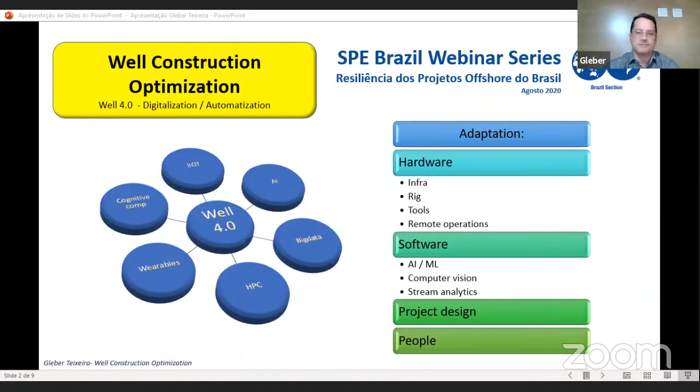This terminology, in general terms, represents the widespread and interconnected use of emerging technology such as digitalization, automatization, IIoT, wearables, AI, cognitive computing, big data, and so on. Everything, of course, applied in well construction activities, among other things, to optimize the process as a whole.

For it to be possible, research, development, and of course, adaptation are necessary. So talking about adaptation, I would highlight some topics, as we can see on the screen, to have this well 4.0, or all these things together.

We need adaptation in the hardware, and I mean infrastructure, rig adaptations, tools, remote operations, and so on. Of course, we need, moreover, software adaptation to supply conditions to have a pipeline in AI, machine learning, computer vision, stream analytics, and so on.

Moreover, we need the project design adaptation, and of course, the main drive here is the people adaptation, as we will discuss further. Please, next slide.

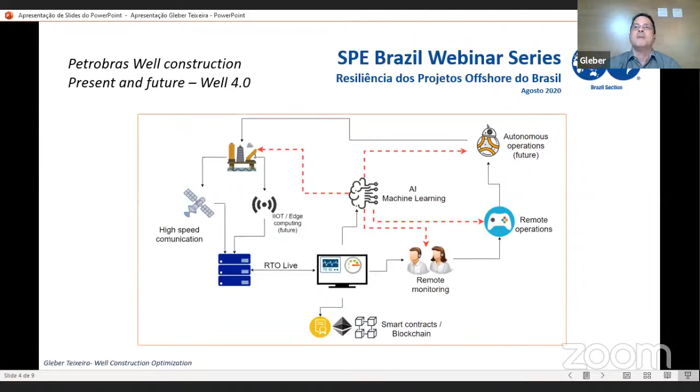Here I am showing the decision support center in Petrobras, as we are testing remote monitoring and also remote operation, and maybe in the future autonomous operation. I'm going to show a very brief video to show you some of the developments and ongoing projects in Petrobras. Here I am showing the RTO Live that brings all the data sensors from the rigs.

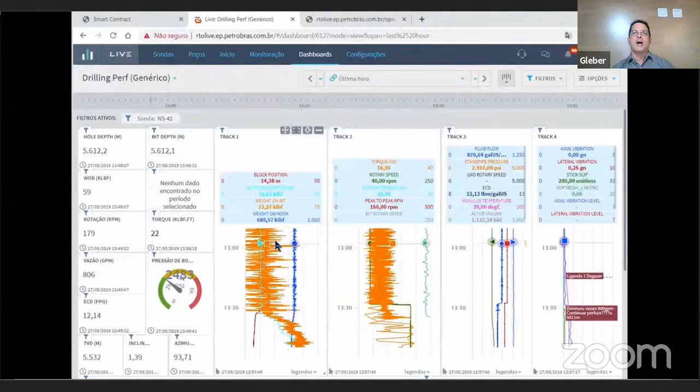Here is our prototype of smart contract using blockchain technology, emulating the Ethereum blockchain. We are emulating sending the monetary unit from the contractor to the blockchain and through the third party company. Of course it's a prototype, it's an emulation. Here I am using the Ethereum blockchain to record all the transactions.

Here I'm showing you a system that detects oil and gas seepage, oil and gas leakage. Another system detects movement using computer vision, movement in the wellhead, to see how much movement there is.

And here is a project showing a system that evaluates bit abrasion, the max drill depth based on lithology, area, bit model, and many parameters based on machine learning algorithms that we trained with historical data from our database.

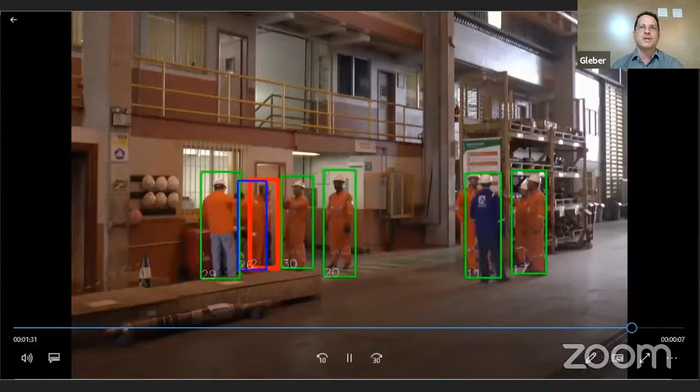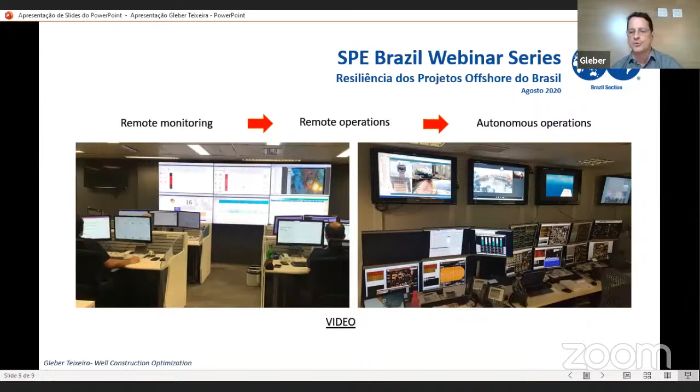And the last one is a video showing the S3MS, a partnership from our research center, CENPES, in partnership with UFMG, UNESP, Instituto Eldorado, for detection of personnel using or not using PPE.

Just a brief commentary about the video we passed, that image showing the oil leakage in the seabed was provided by Professor Bing Wang from University of Missouri. They provided us to test our algorithm that's still in development in UFF, Universidade Federal Fluminense, and also the Projeto Reis in Petrobras.

Another software I'm showing you is about design automation. In fact, it's a well-design platform that we call Poço Web, and we want to provide in the future all the automation and intelligence layer to perform all the steps of well design, based on simulations, based on historical data, and so on. It's an ongoing project that we are developing in Petrobras.

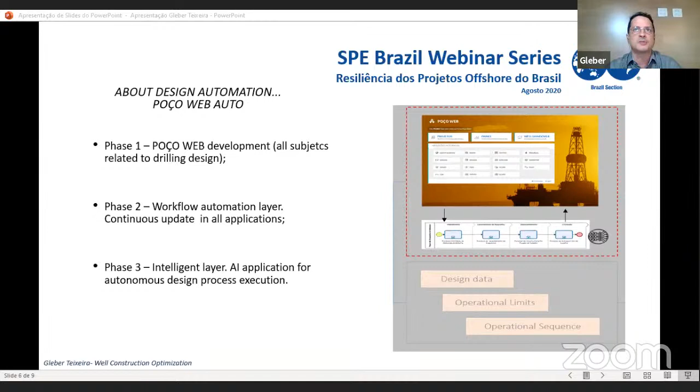Next one, please. I have just 1 minute more. Sorry, because it's so fast. The time is very short.

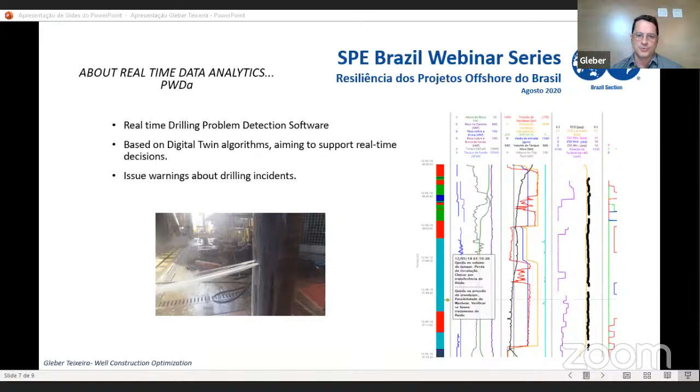Talking about real-time data analytics, we are developing the PWDA with E3S in partnership with E3S. It's a real-time drilling problem detection software based on digital twin algorithms to support real-time decision making. And here in the picture, we are showing when the software detects a possibility of washout, we pull out the string and detect, in fact, there was a washout in the string.

So finally, what do we expect from well service providers and the driller contractor? We can highlight this main issue: new technology, of course, meaning cost reduction, communication protocol agreements, for instance, with WITSML, Modbus, MQTT, REST API, and so on.

Another very important point is the training and qualification of employees. We are not talking just about conventional employees, for instance, petroleum engineers or chemical engineers. We are talking about new data skills and new jobs, for example, data scientists, data engineers, IIoT technicians, blockchain developers, and so on.

And finally, contractual adjustments, of course, to make it possible. And all these things, of course, we keep an eye every time on improved safety conditions and improving to avoid problems during operations. So my final remarks: we need to have resilience to be competitive in the current scenario, as Pedroso said in the beginning of the event.

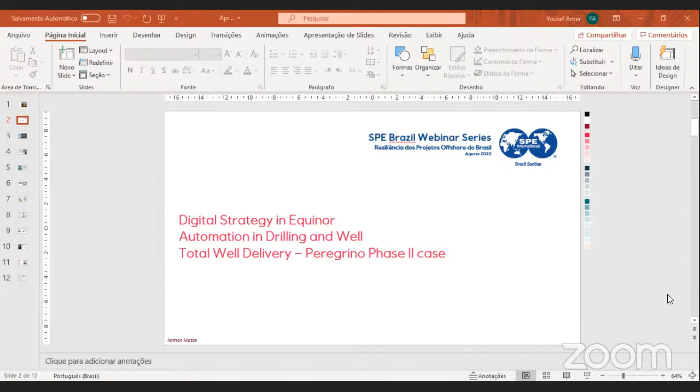Hello? Could you please put the slide in full screen, Pedroso? Hello, can you hear me? Oh yes, let me see if we can fix that. That's okay, good, thank you.

So I intend to go through three main items. I'll start by giving an overview of the digital strategy in Equinor and how optimization fits into that strategy. Then I move to the second topic, narrowing to automation in drilling, which I'm sure will draw our attention to the main initiatives to optimize well construction. And finally, our case in Peregrino Phase 2, called Total Well Delivery. My idea is to briefly touch upon this in a 15 minute presentation and give enough time for good discussions and questions. Okay, next please.

I would say that every great achievement starts with a good plan, right? So here I show you what Equinor believes in regarding digital strategy. Just by labeling ourselves as the digital energy company gives an idea of our ambition on this matter, right? On the left side you see the three main items of the corporate strategy, and on the right side, our digital directions.

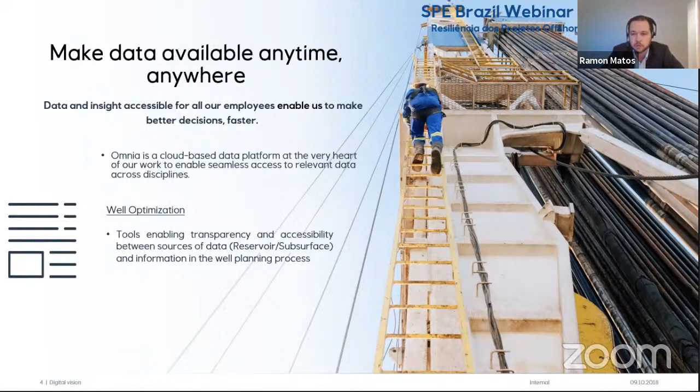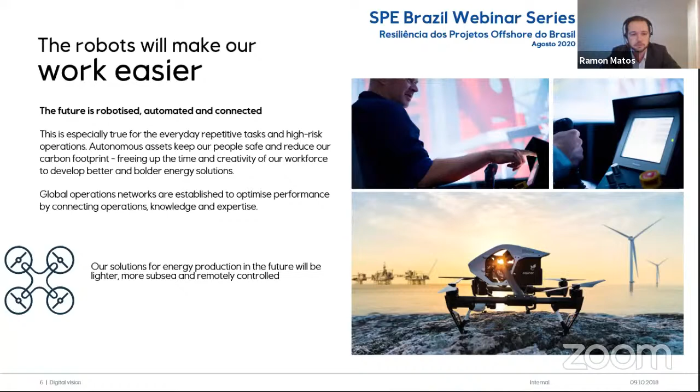And then we get to the end of the strategy. As I said, the digital path has to be built by people with the right competence. That's why we have been investing in training our people to get them acquainted with all of these innovations. 50,000 digital learning sessions is a remarkable number achieved by our digital academy. In drilling well, for example, the rig simulators train the crews with the newest technologies onshore. It's one of the initiatives, and we have one of these simulators in Brazil dedicated to the Peregrino Phase 2 project.

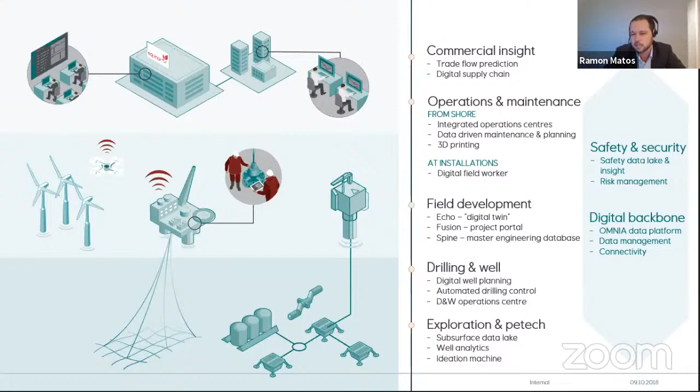So in sum, I believe we were able to see that digital tools are a key enabler in securing efficiency, value creation, well construction optimization, and making everyday life easier. In this slide, this is the way we want to materialize digitalization in Equinor. The most important points are here in summary, but we highlight the 3 main projects for well construction. I intend to talk a little bit more about digital well planning and ADC, the Drilling Operations Center.

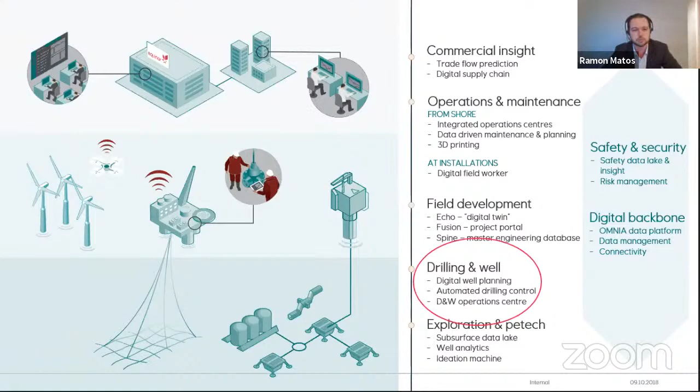As I said, the first big chunk is automated drilling control. The ADC is developed through automation of systems that are responsible for feedback from the well. It allows drillers to automate repetitive drilling activities, such as making connections, defining specific parameters for circulation, weight on bit, and more. There are several activities. It's connected to the main rig equipment, such as the drawworks, top drive, and mud pump. And by real-time visualization, it brings to surface some downhole conditions, especially in conjunction with wired drill pipe.

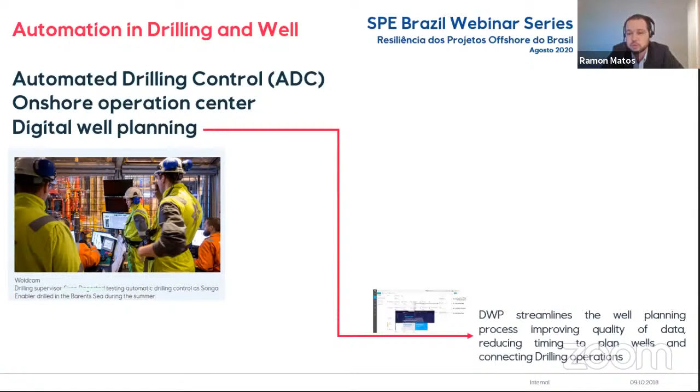The second one is a big development, the onshore operations centers. Personnel allocated will apply real-time data in a more structured way than before. They will use advanced monitoring equipment based on data from the drill strings, and in some rigs using wired pipe. The third prioritized initiative is the implementation of digital well planning. For Peregrino, we are going to use this solution from Schlumberger, the DrillPlan. It's key for us in drilling well, it's quite based on being efficient in planning the wells, so a good and robust tool will definitely help the operators achieve this goal.

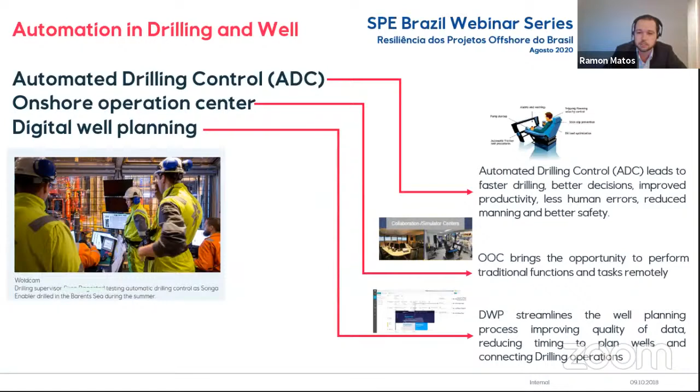So moving on, I mentioned several times Peregrino. Even though prior to this slide I was trying to cover the digital initiatives in Equinor as a whole, here I give you a flavor of the Peregrino field.

First oil was in 2011 with proven reserves of approximately 400 million barrels. We reached 200 million barrels produced last year, a big milestone. For those who don't know, Peregrino has two fixed platforms tied to one FPSO with capacity of 100,000 barrels a day. For the second phase of Peregrino, we will bring one more platform, which is actually already here in Brazil. First oil is planned for 2021, and it will add around 300 million barrels in reserves for the field.

With this mention of Peregrino Phase 2, we can go on.

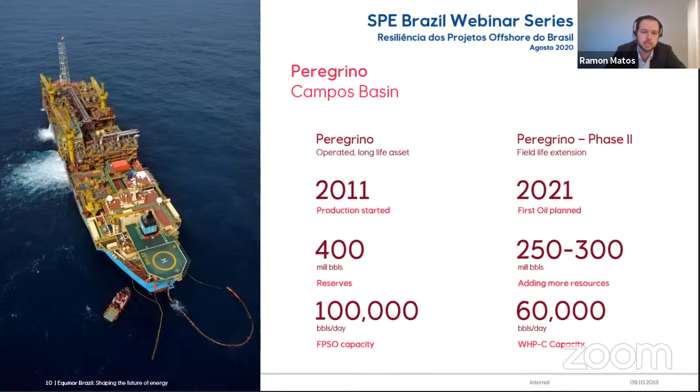With this, I can connect well to my last slide, where we have a partnership with Schlumberger in this project called Total Well Delivery. The expectations on the Total Well Delivery model are quite high. We understand that this represents an opportunity to make a step change in performance for HSE, cost, and efficiency. Some efficiency improvements that Equinor has implemented in the past have been flattening out now, so TWD's success is important, because with this structure, automation, digital enablement, and multi-skilled crews, we can improve consistently on our drilling operations.

Total Well Delivery, it's not there yet, just a second. Total well delivery was possible mainly because of the full integration of services and scopes, including the drilling unit provided by Cameron. The contract has almost a full scope on the well construction, going from the rig equipment to drilling services. So it's a new project.

The rig has a mechanized pipe handling system upgraded with automated drilling control. The fluid system has remote operated valves and instrumentation installed on the main routings. This is just to give you some examples of automation installed in the equipment offshore. These newly installed hardwares, aggregated with condition-based maintenance supported by the new digital platform, are promising for this project.

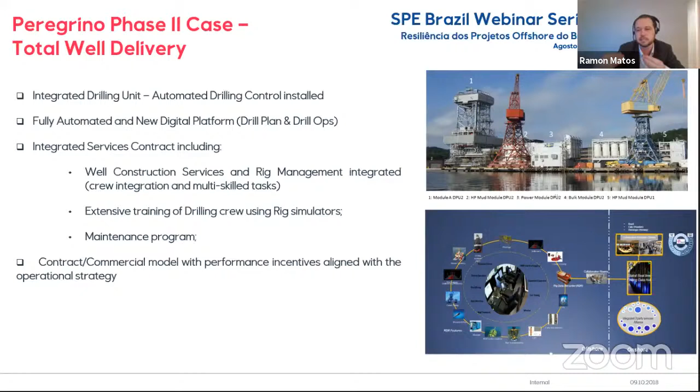When it comes to this digital platform, that stands for all the initiatives we have discussed in this presentation. But for well optimization in Peregrino, ADC, drill plan, and drill ops are the most important, and they will connect well to give that digital platform.

So finally, the last and one of the most important factors is the commercial model. It was built to promote continuous improvement from contractors and give them incentives to deliver the best performance. The contract is based on a lump sum per section with performance bonus aligned with the operational strategy, giving the possibility to invest in technologies and have commercial alignment.

That's what I had for today. Again, thank you very much for the invitation. It was a pleasure for me, I enjoyed being here and speaking about it. Carlos, I'll hand it back over to you.

Thank you very much, Ramon. It's very interesting to see the integration of Equinor towards this digital transformation.

You mentioned something that is allowing the information to be available for everybody. That is what I've heard - removing the silos of information and its need. If we want to drill a well, we have to remove the silos. The information has to be available for everybody.

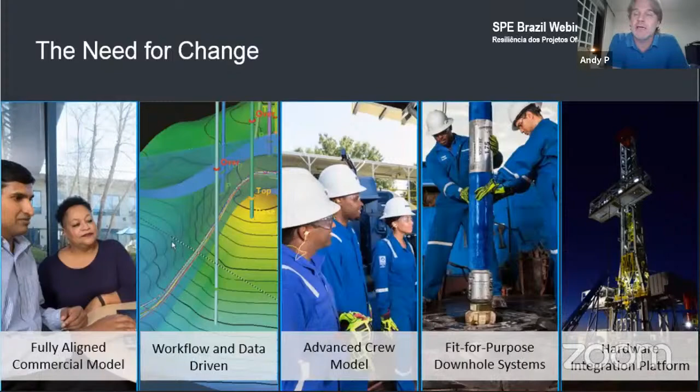We've developed fit-for-purpose downhole systems and sensors, which I'll come on to later. We also have an integrated hardware platform which allows us to combine data from both the downhole sensors from the bottom hole assembly, and also all the surface sensors on the rig, because we've also provided the rig equipment and rig sensors. So if we can move on, thank you. Next one.

So essentially we have a new concept here, designed around four pillars that are all required to be successful. We have a mechanized and automated drilling rig, and Carlos, after me, will go into more detail on what that is and how that works. A personnel model, which I've touched on, about integrating and synchronizing the drilling crew and the drilling services crew on the platform to work as one team with Equinor themselves on the facility, so it's a harmonious relationship to get things done, and we're all motivated in the same way to achieve the same goals.

We have a digital workflow for both well construction and well design, which again Ramon touched on here, called Drill Plan and Drill Ops, which I'll explain shortly. And this is all enabled by being awarded the full scope of well construction services, which is one of the points I initially touched on, to reduce the complexity, reduce the number of stakeholders involved in drilling a well, and reduce the communications interfaces. Ramon and his team at Equinor work through me and my team, and we have a very close relationship on day-to-day matters and work in a coordinated way to prepare the platform ready for drilling. Okay, if we can go to the next slide, please.

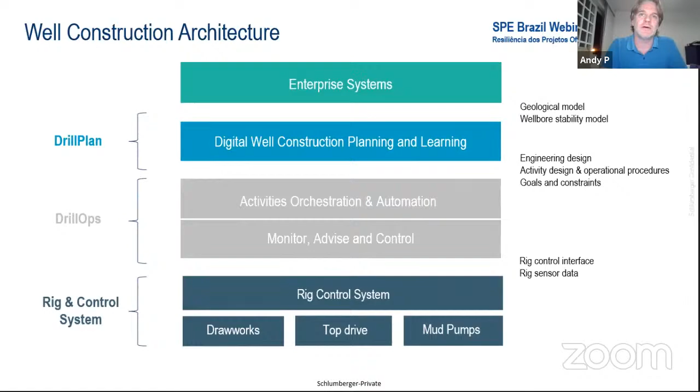We plan together with them and ourselves, doing fluid hydraulics, cement plans, BHA design, etc., and come up with a digital drilling plan. We send that digitally offshore to the drilling environment, where we sit with the company man and the fluids engineer, cement engineer, directional driller, mud logger, etc., in a collaboration center, one room with everyone sat in it on the rig that's been designed as part of the platform design here.

And then the driller can either take manual control or allow the computers to take over and drill the well. The well knows digitally the plan, it knows where the BHA is, it knows where it's supposed to be, it knows what all the drilling parameters should be and what they are, and then it adjusts things to drill the well automatically that we have designed, with visibility in town of all of the data from all the sensors combined.

Feeding back in a fast loop to the driller to identify issues and give guidance on performance improvement, and a slow loop that returns back into the planning phase so that any lessons learned and best practices from the current well are built into future well designs to allow us to have continuous performance improvement from one well to the next.

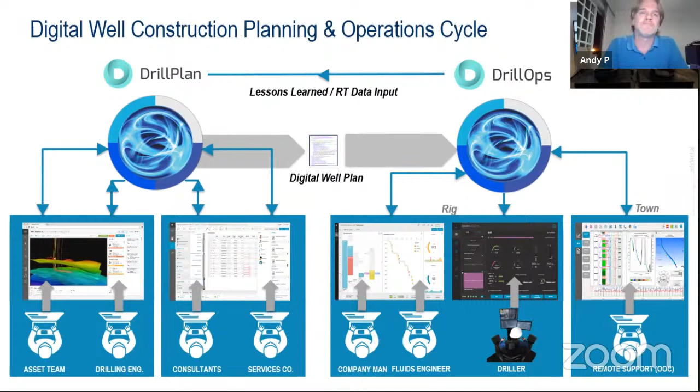So drill ops, multiple parts of this. I'm just going to touch on orchestrate, automate, and advise, which are the things to synchronize our activity, increase consistency, and optimize performance that I've mentioned.

So orchestrate, I'm not going to talk through the details of this. You can read it as I'm going, but it allows us to standardize how we do things, tripping in, tripping out, BOP tests, whatever it may be.

The system actually knows how to drill a well, so it adjusts the individual building blocks of well construction, puts them in the right order for us, and then instructs the computers and through that the rig equipment to perform those activities. So it can trip in, land on bottom, break circulation, start drilling, put weight on the drill bit, drill ahead, and all automatically without the driller actually having to do anything, because it knows how to do that sequence of activity.

And it will move all the surface equipment on the drill floor in parallel together. And as a result of this, things are safer because we have to therefore remove people from the rig floor and completely automate the rig floor and create a red zone entirely.

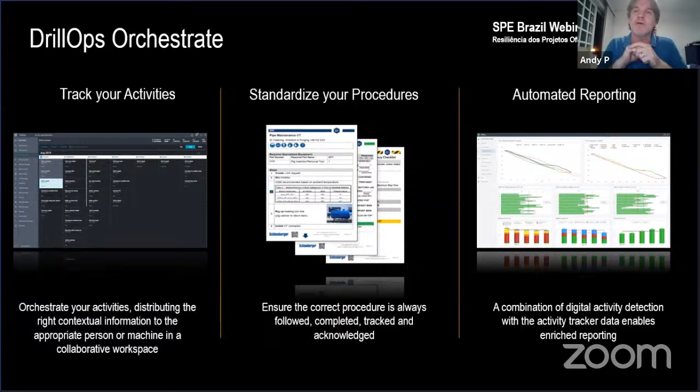It can also automate reporting and tell us what it's doing because it's doing everything. It knows what it's doing. We have the automation side of things here. I've already spoken about that.

Basically, we have a digital drilling program. It knows how to drill a well. It tells the equipment how to do so. So it can ramp up the pumps, tag the bottom, deal with friction factors, mitigation, stringers, shock and vibration. It can even program downlinks, change directional control of the BHA, deal with top drive stalls, washout detection, stuck pipe detection, immediate response to that rather than relying on the driller to remember what to do, for instance.

It's a little bit like a GPS. You tell it where you want to go, it figures out the best route and gives you the instructions, or frankly now takes over the controls of the car and steers you to your destination, and you as the driver are just sat back watching, making sure that things are going as they should do.

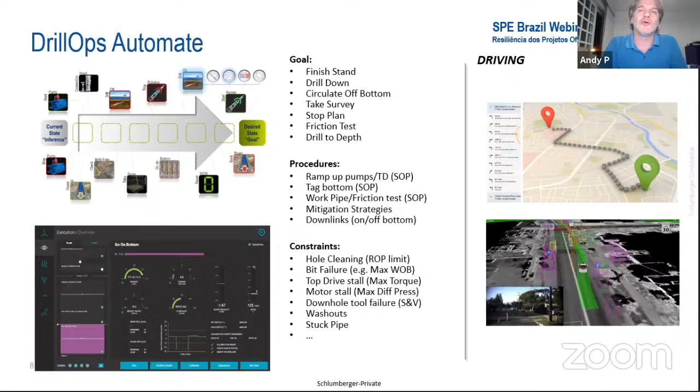And then DrillOps Advise. We gather all the sensor data, we show it to the driller, we show it to our operations team in the collaboration center, we beam it onshore, we monitor it 24/7, we identify areas for performance improvement, reliability improvement, consistency improvements.

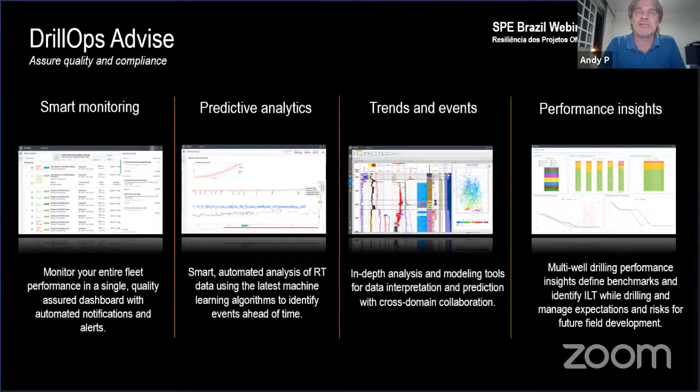Feed that back to the rig or feed it back into the drill plan so that we design wells with these efficiency gains built in for the next time that we drill.

So to finish here, what have we got? Digitally enabled operations to optimize well construction, automation of hardware, sensors, software, and then both the services crew and the crew themselves, all from the same service company. Automated workflows, automated drilling activity.

Cross crew support on the rig, so everyone helps everyone else out, motivated to perform in the same way with the same drivers that the operator is trying to achieve, to reduce drill time, improve safety, improve drilling performance, reduce non-productive time, invisible lost time through consistency improvement, drill the well we design, safer because we remove people from the rig floor, let the computers drill the well. It's faster, lower cost wells, simplified operation.

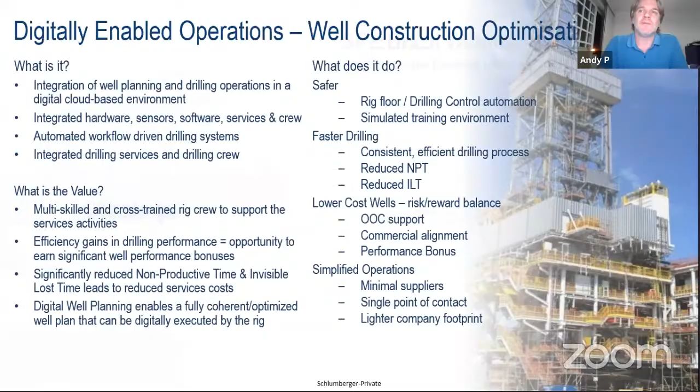And I think that was my last slide. So with that, I will hand it back to Carlos, and then Carlos Garcia will take you through details of the rig itself and how we actually put what I've just explained into practice. Thank you, Carlos.

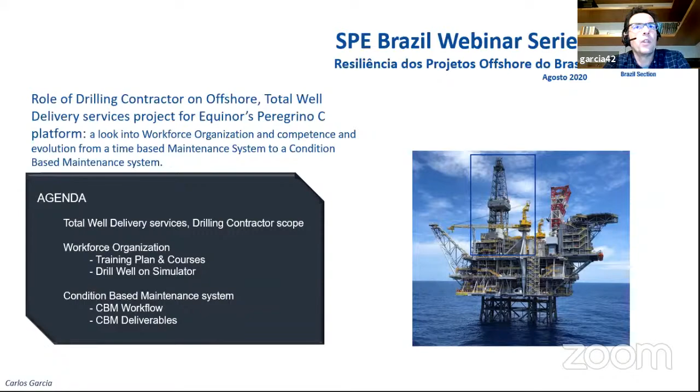In summary, the contract that we have with Schlumberger as far as the drilling contractor services, which is part of the Schlumberger total well delivery scope, is to manage the drilling crews for the DPU, provide the maintenance crews offshore to do all the maintenance tasks on that DPU, and then we provide support on procurement and warehousing of all the spare parts needed for this maintenance. This is in summary the scope that we have in this project.

On the mechanized and automated drilling rig, it's important to remember that we are not providing a rig which belongs to us. It's an asset that belongs to Equinor. So this is a significant change in our work scope.

So the DPU equipment commissioning and acceptance process is a very important one, because it's a time when basically the operator Equinor, ourselves, and the OEM, companies like Cameron, which is also a Schlumberger company, and Siemens, all the companies that have provided the equipment, get together, check that all the equipment is duly performing, all the COCs are in place, and then when all this is checked, it will be handed over for us to manage this equipment. The next one will be the maintenance team.

Yeah, the maintenance team competency is very important for us to be sure that they're trained, and since they come from different backgrounds and have been brought together for the Peregrino project, we are training them, getting them ready to understand this new asset and manage it appropriately.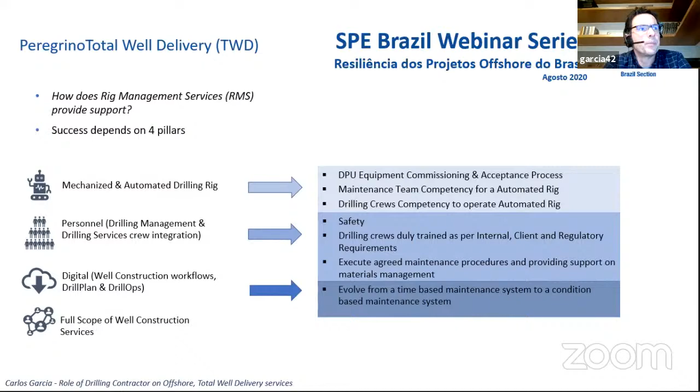Executing the agreed maintenance is also important. And on the last subject, I will touch on how the CBM is going to be evolving from a preventive system, which is time-based, to condition-based maintenance.

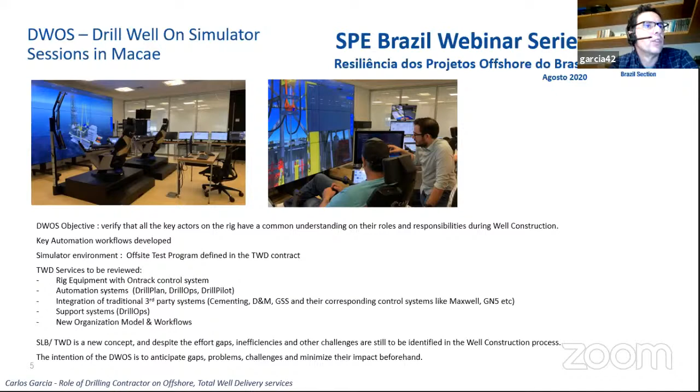Now going into condition-based maintenance. To explain roughly what this means, typically the drilling contractors' maintenance programs consisted of time-based maintenance, where an equipment has different tasks monthly, quarterly, every 6 months, or yearly. The purpose of any maintenance program is to reduce NPT and optimize the maintenance costs.

Basically, what CBM proposes is the same objective, but it will give us more resources to be able to optimize this. So you can see the deliverables for this are equipment health status, optimized maintenance execution, and simplified recertification, which I will talk about later. On the right of the diagram, you can see on top what a typical non-CBM maintenance looks like.

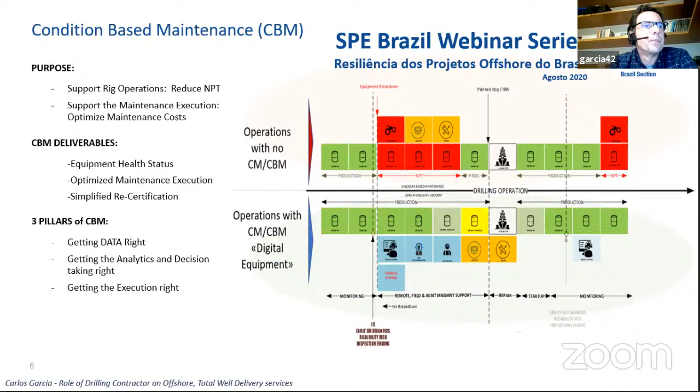This is an overview of the CBM workflow. On the bottom left is the main equipment on a rig, and through inspections and telemetry you gather data. This data is then securely transmitted to a cloud - in Schlumberger, this is a Schlumberger Azure cloud. Once it's in this cloud, we use analytical software and artificial intelligence to process this data, and after processing we're able to see the results on a web portal and through internal reports.

This is shared with the maintenance crew, who check the first deliverable, which is the health status of the equipment, and then they can recommend optimizing maintenance execution, which is deliverable number 2. Once this has been decided, it's communicated to the Equinor team, because SAP is the system under which maintenance is run for Equinor. So through planned work orders, the SAP maintenance procedures will be changed, and we arrive at the third deliverable - after running CBM for some time, we'll be able to measure how effective the program has been.

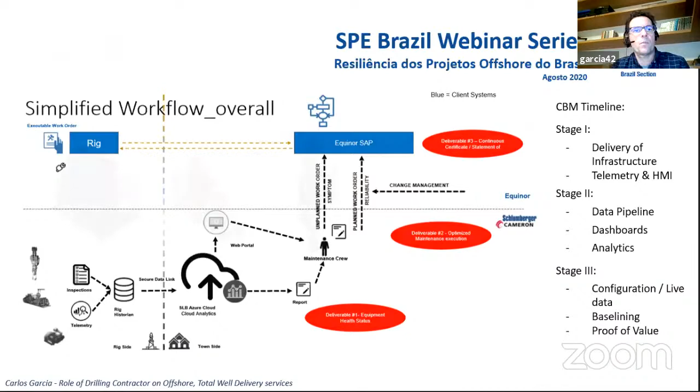On this slide, you can see the equipment chosen to start off with on the CBM maintenance system. We'll start with 3 main equipment first: a hydraulic power unit, drawworks, and top drive system. This equipment is part of a system which breaks down into equipment and then sub-assembly. Each sub-assembly component will have a specific set of data analyzed, which produces, after running through the analytical software, a set of recommendations and status on where it stands.

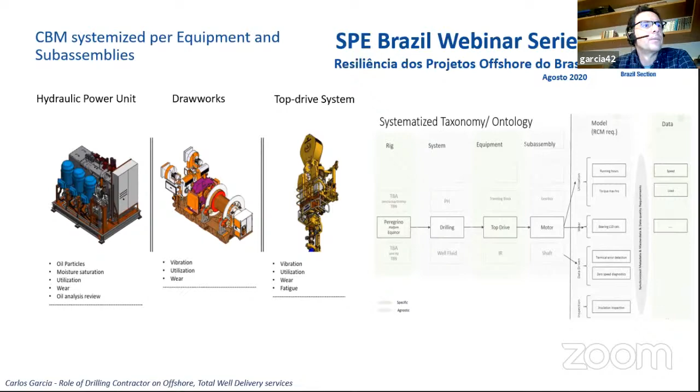On this slide, you can see the equipment health status - this is the output that the maintenance team can see for each equipment. Through this data, they'll be able to predict if anything is malfunctioning, so they can change the timing of a planned maintenance task, or even extend the next overhaul to a later date. This is the type of information the maintenance team will see, and the analytics will be updated and processed to keep the system current.

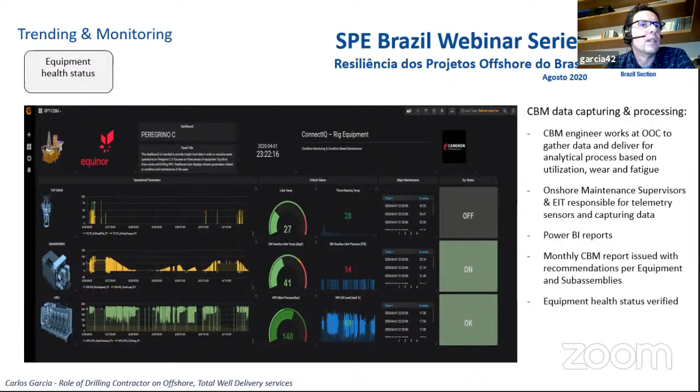This is the next analytics type of screen that the maintenance team and the CBM engineers and specialists are developing. For each equipment, you can observe on this graph, for example, fatigue damage for threads in one picture, and another type of fatigue damage below. All this is run through artificial intelligence analytics on the Dataiku platform, enabling the teams to develop the models for CBM maintenance on the platform.

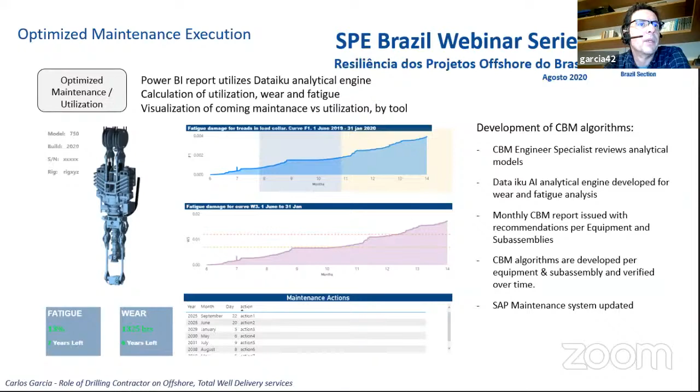One question I saw while the others were presenting is regarding what percentage of automation is on the platform. I would say that today we have covered more than 90% of automation - basically everything that needs to be automated is automated.

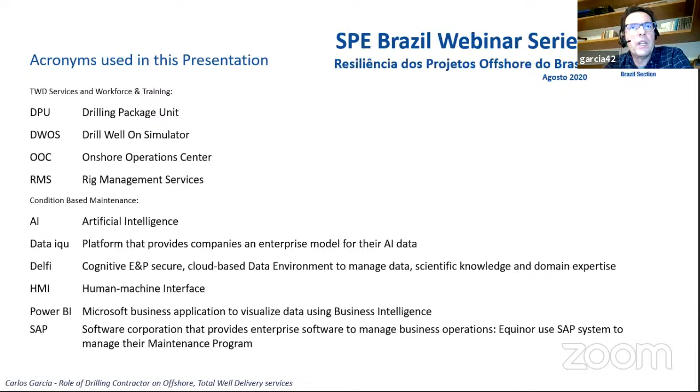We have equipment that will be added to operations, for example from other third-party companies, which we're also looking at adding telemetry and sensors to, so this equipment is also added to the scope and we'll be able to include them in this analysis. So not only the equipment currently on the platform can be monitored, but any additional equipment later added as a service on the DPU can also be digitalized and added to this, if it's important to monitor.

Thank you, Carlos Garcia. I was curious about how much training is needed to have a crew ready for this kind of process. Well, I'm still curious, I believe we'll have to ask you later. But now, you answered the first question from Cabrera. So let's start with some questions from the audience. I have one for Gleber.

From Gleber: is the PWDA based on CBR, case-based reasoning?

Excellent question, Pedroso, and excellent question, Gleber. In fact, no, the PWDA software is mainly based on hydraulics, mechanical and physical algorithms that try to represent all the drilling operation. So we have some kind of digital twin, between quotation marks, that tries to emulate all the operation we have on bottom hole during the drilling. If some behavior doesn't totally agree with the simulated behavior, for example, the pump pressure should be increasing and in fact is decreasing, the simulation will infer that some kind of washout or jet problem in the bit is happening, and so on. So it's mainly based on mechanical and physical algorithms. But in version 2, we are implementing machine learning algorithms based on historical data and so on. But the first one is mainly digital twin, mechanistic, and physical modeling. That's it.